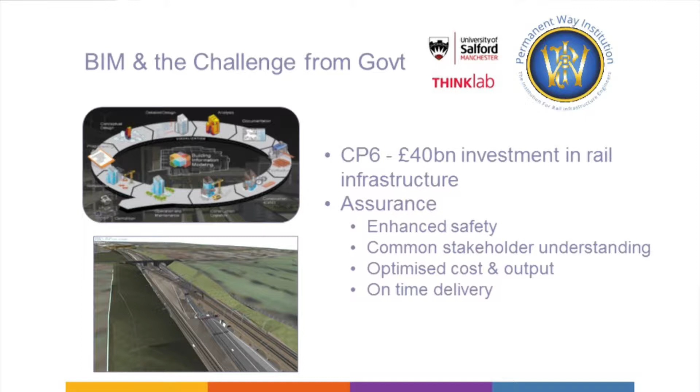The work that we've done is also an attempt to respond to the challenge from government to provide better value from the £40 billion of planned investments in rail infrastructure through CP6. Generally, it arose out of a request from Network Rail about 4 years ago to look at a specific track engineering project, a renewal project on the West Coast Main Line, and to look at the way that project was being planned and try to provide greater assurance in terms of safety, common understanding of all of the stakeholders involved, multiple stakeholders on that project, to try to optimize the cost and the output of that work, and also to make sure it was delivered on time.

So those are the general objectives, but more specifically, this project required a 9-day blockade of a section of the West Coast Main Line. And two different groups within Network Rail thought that it was best done like that. Other groups thought it could be done with less disruption in a series of smaller possessions. And this solution was initially built to try to model the different scenarios and see which of these solutions would actually work best. So that's where it comes from.

We've been working now with Network Rail for 4 years on a series of different projects where this software has been deployed. And the way we work is that each time we have a new project, it's generally an opportunity for us to add more functionality into the overall software solution. So it's been building, it's been getting better, and I'm planning to show you a demo of where we've got to today.

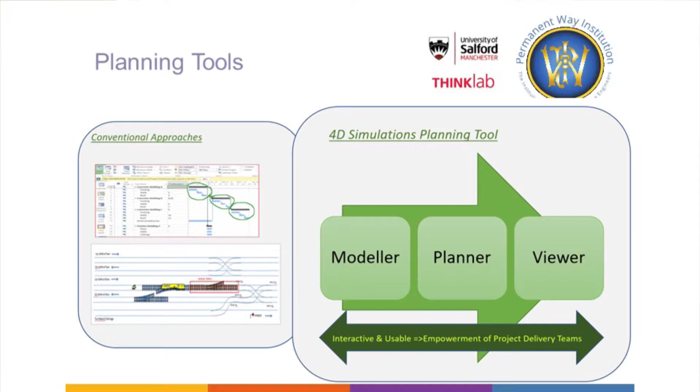And then what we have is the viewer. And the viewer creates a 3D realistic simulation that you can view from any angle, any perspective, to see what's going to happen and what that work is going to look like and feel like when it really takes place. So these are the three elements that we have built.

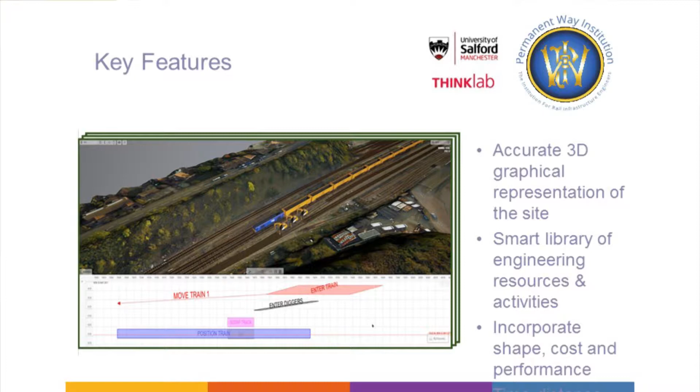So key features, so 3D representation of the site. Beyond that, we also have a library of engineering resources and activities. So what that means is when we talk about diggers and cranes and these various other assets, we have used and imported into our solution CAD models which have engineering accuracy and also information about the activities that those different pieces of machinery can perform during a piece of work. And the user, the planner, can select from that palette, if you like, that library of resources, and use that in the construction of the plan.

And that incorporates shape and cost and the performance of those assets. So we get a more realistic and more accurate plan as a result of having all the information there and available. You begin to see there a picture of what the software looks like, but we'll see that when we move into the demo.

So projects completed. There's been around 15 uses of the thing so far that are projects that have actually been completed through to the end of the actual engineering work. We have a few in progress at the moment.

Most of this work has been in the delivery stage. So our engagement has mostly been at GRIP stages 4 through 6, with the people involved in actually delivering these projects. Recently, though, we've actually started to work on projects at an earlier stage, GRIP stage 1 to 3, more in the optioneering phase, where there's been a requirement to model different types of designs. And that's interesting and takes us off in some new directions in terms of the functionality that's called for.

So we think it's been broadly successful. We've had good feedback from users. However, we could certainly do this more, and we believe what we're working towards is a new way of working, if you like, that could maybe in the future become a standard within the industry. So I'm now going to toggle to my own laptop so that we can start to see the demo.

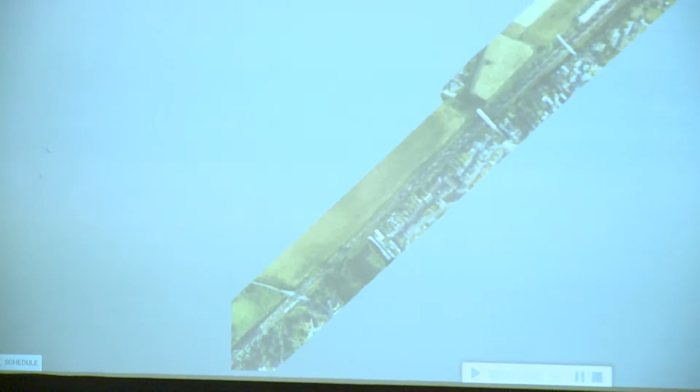So the first thing to note is that this is running on a laptop. It doesn't require a supercomputer somewhere. It's all pretty simple stuff. You need a reasonably powerful laptop, but it's nothing particularly special. The software is built

by us. What we normally have is we receive a request from Network Rail, normally, for a model to be built for a particular site. That's defined in terms of the geographical extent of a particular site. The site we're looking at there, you see an aerial imagery of a site that's about 2 kilometres long. In practical terms, that's about the biggest site that you would want to have within one particular model.

If you go beyond 2 kilometres, it tends to be a little bit tricky to navigate through the site, as we'll actually see. We could build more functionality to make that easier and enable bigger sites. It's not really a technical limitation on the size of the site. But the software is then created, it's incorporated with the model of the site, and then a user can download that and then work with it locally on their PC.

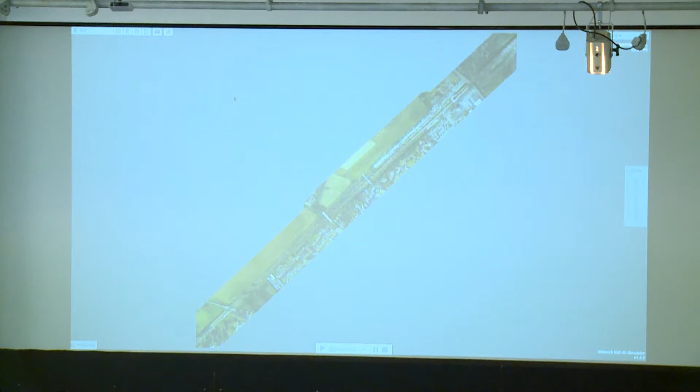So, what we have is an overview. And as I just zoom in, you'll start to see some evidence of what's going on here. So you can see the aerial imagery, and you can see the railway flowing through that particular cutting there, I think. But you'll see embedded in there more of a computer cartoon type presentation of the actual position of the track. So that's the actual position of the track overlaid onto the terrain.

And we can look at this from different angles and perspectives. We have what we call this orbital view. So it gets a bit spinning, and I'm not going to leave that on there for long for the risk of somebody having vertigo by watching this thing spinning around all the time. But I'll go to this free view, which will basically let us see where we are. So we can see a digger there, and we can see the track.

And at any point in the solution, we can change our perspective. We can move around in the site. We can view the thing from any angle, and we'll see some examples of how this is used in a second. Now, another key element of the solution is really the schedule.

And the schedule is a time and distance plan, where it's a chart where on the horizontal axis we have distance in chainage from a reference point within the site, and then down the left-hand side we have time. So in planning activities that are going to take place within this project, we simply click and add an activity for a particular resource to perform a particular function. It's fairly simple stuff. So before we can do any of that, we need to see our resources.

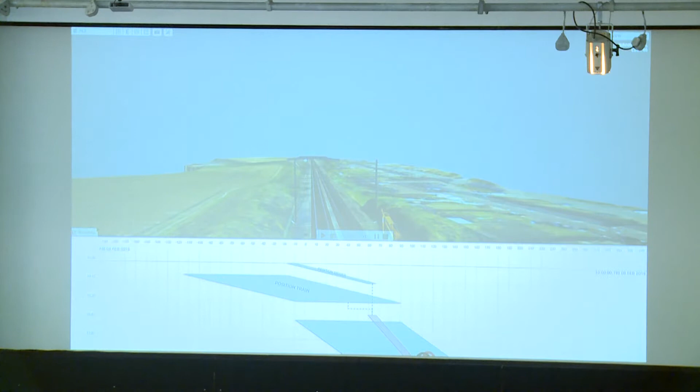So what I'm going to do, I'm just going to take the schedule away for a second, and we'll actually just look at what resources we've got available here. So I may want to add a new one, but we'll just have a look at this thing called the scrap collection train. And as I just expand that, we'll see that the train that we're talking about is made up of a locomotive and 4 Falcon wagons.

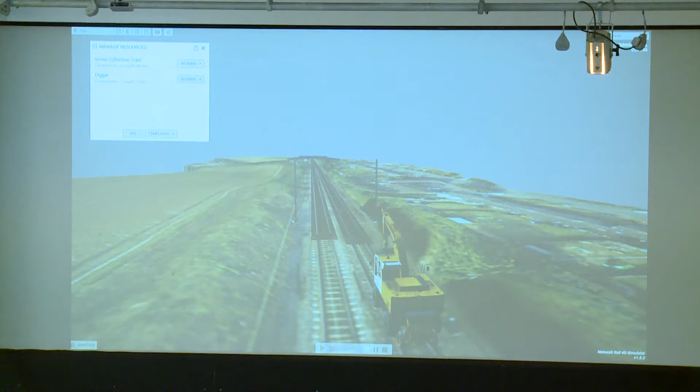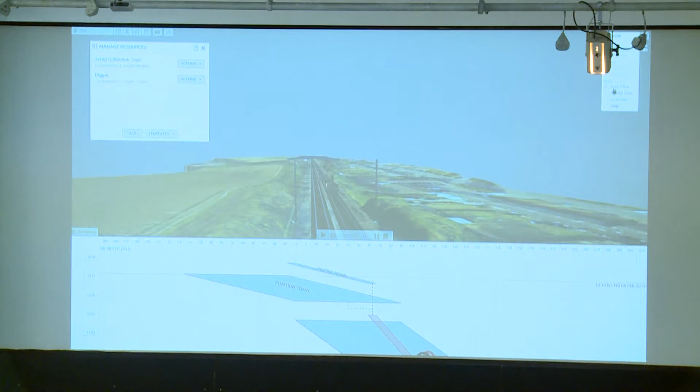And actually, let's just display the thing in the graphics. So if I go to there, then we just quickly switch to our orbital view. We should get a clearer view of it. Yeah, there it is. So there's the train that we're talking about, and I'll just let that thing spin round so we can see what's going on with it. That's probably enough. Okay, I'll just stop it there.

Okay, so if I wanted to change this resource, if I wanted a different type of train with some different components, I could go and add a new one, but for simplicity here, I'll just modify this one.

So if I wanted to add in, for example, a Kirow into that particular train, I could add it in, and I could position it within the thing, and then if I apply the changes, we see the graphics modify there and then, and we can see that resource. So we can put together any combination of resources that are then used for our different activities.

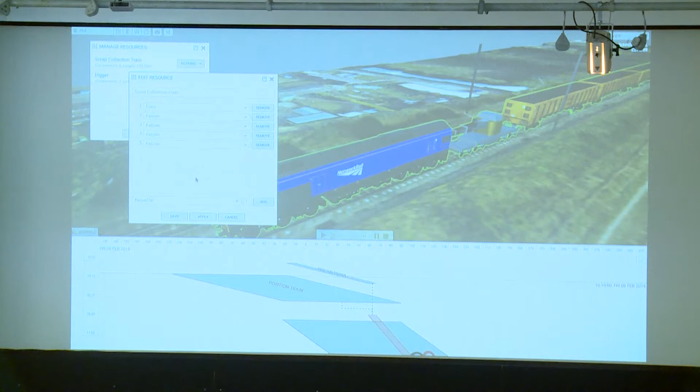I'm going to take that one out for now. And we've got a library of about, I think, 20 different types of equipment that are used within the projects at the moment. But as the different projects come to us, we typically find we need something else, and it's fairly quick and easy for us to add in new resources into the library that we have available.

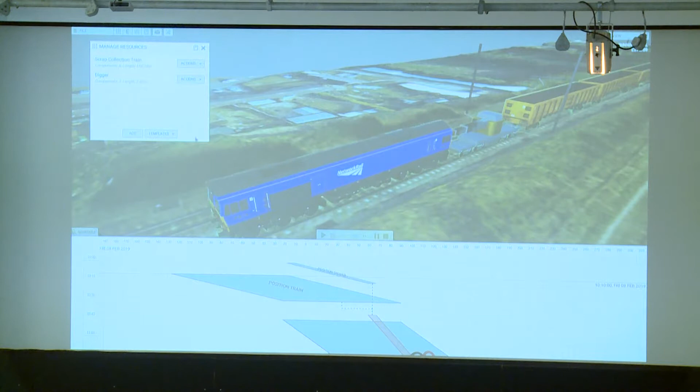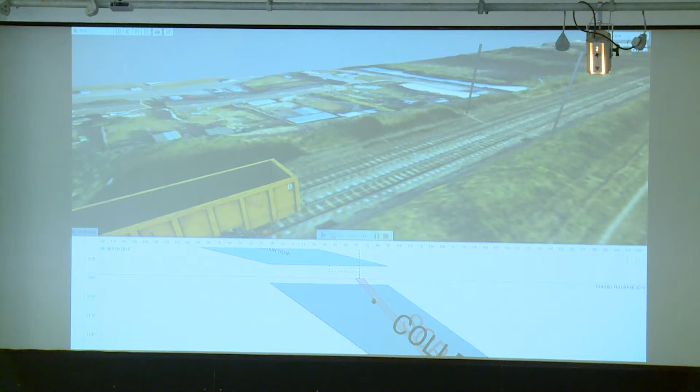Okay, so that's resources. And then when it comes to actually defining what they do, we have the time and distance plan. So if we look at, for example, this action that says position digger. In fact, actually, let's look at this one here that's in red that says scrap on it. I'll just zoom out slightly so we can see what's going on, because we've got activities going on in parallel, so the text kind of overlays there.

But if I just double click the action on the time and distance plan, we can see we have an action which is for the digger, that's within our plan here. It's called scrap, and it's got an action assigned to it which says scrap the whole track. And the planner can choose from this library of different actions, whether you want to scrap an individual rail, to install a new rail, to add top stone, to add ballast, whatever you want to do in there that's related to track engineering, you can select from this palette of different activities.

We then specify from where and to where it takes place. So it's greyed out here in terms of where it starts because the thing did something else previously. It knows where it is, so when we plan a new activity, it starts from that particular position. And we can specify where that activity is going to end. So the track in question of the 2 tracks we have running through the site and a chainage point. Also, what you can actually do is click on the little icon there and then select the 2 locations from the 3D graphics rather than to enter a chainage distance.

Then we specify a time, or what we can do is we can build in project dependencies. So this one is set to only start when it's been positioned in the site, and also when the related collection train has also been positioned into the site. And we can go and build in delays. Yeah, so we can specify it start a period of time after something else. So this is how we construct the plan, and that's what gives us the time and distance chart that you see there.

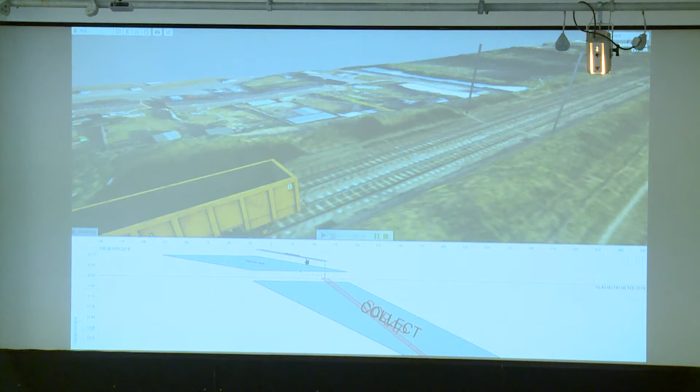So what I'm going to do now is I'm just going to play the action in a moment. So I'm just going to select that point, and you can see I've got the red line indicates time. So as we actually play the action, you'll see the red line time slider move down through the chart as time advances. So if I click play, you'll see the digger start to move.

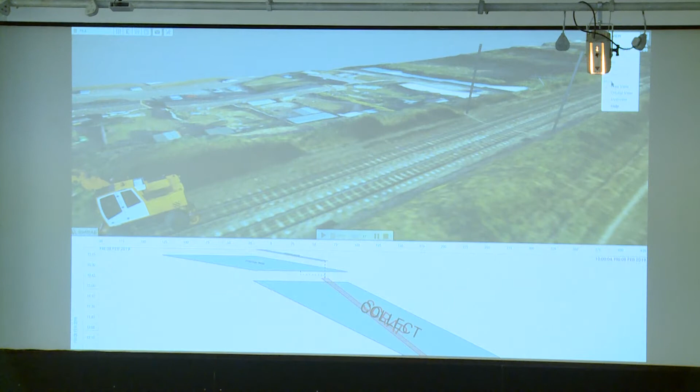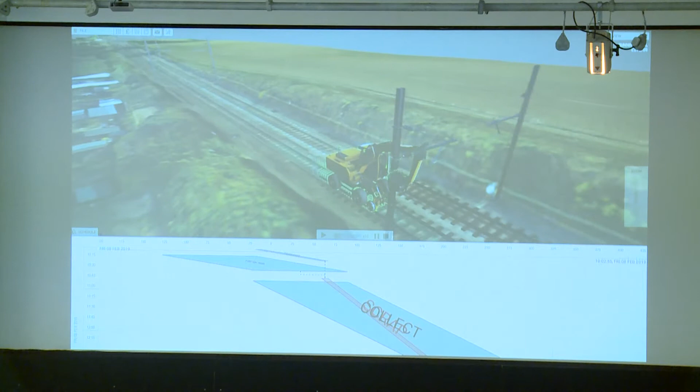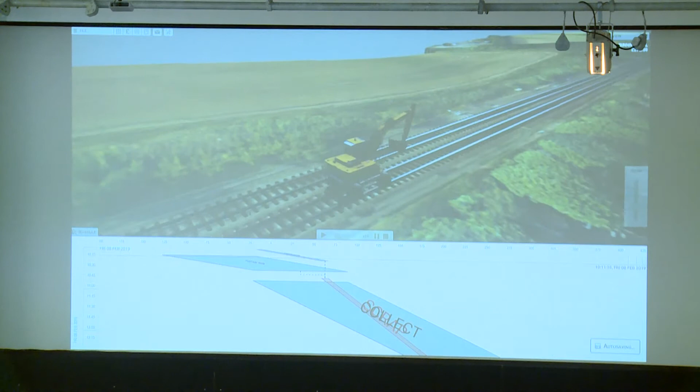And if anybody feels queasy, please shout, but I'm going to go to that view. Yeah, and actually I'm going to speed it up because we only have a certain period of time, and there are other speakers after me. So we're going to let that thing move through the site, and we can see as it progresses. In a moment, then the next activity is this train is going to start to position. And it's highlighting a blue section of the track there as I just hover my mouse over the particular action. So the train will arrive in the site.

Actually, let's just increase the speed a little bit again. Okay. And then in a moment, what we'll see is the scrapping of that particular section of track. And because we chose scrap track, we'll actually see that begin to occur within the scene. So as the digger moves away, yeah, we can see the track begin to disappear.

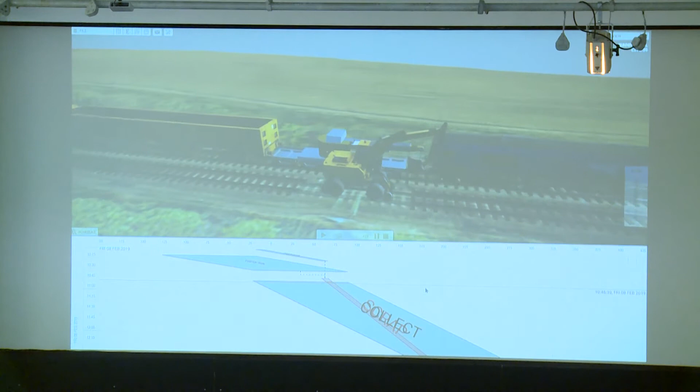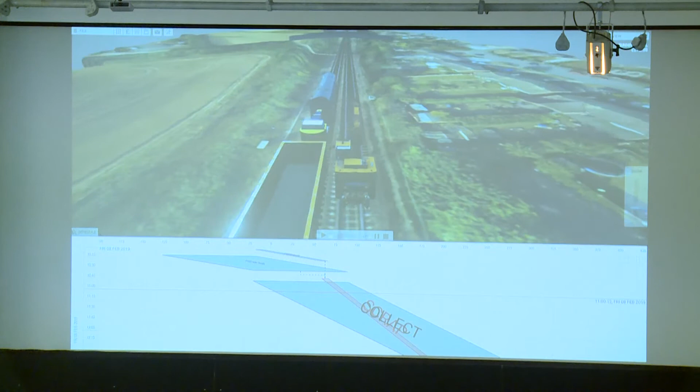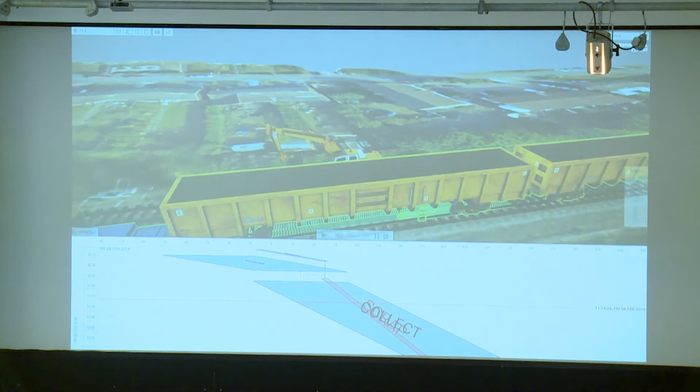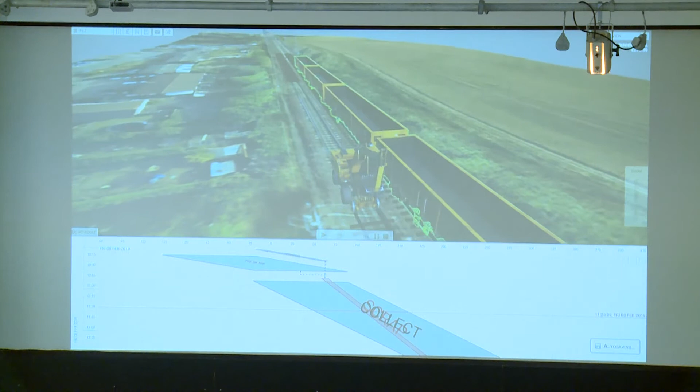And then it'll continue working like that, and the various pieces of equipment will move through the site. So how is this actually used in practice? Let me just pause the action. I'll let the action play a minute. It's proved to be very useful for clash detection, of figuring out we can actually get the equipment into the site. It's also been useful for removing some of the need to carry out a survey. We can actually see what's going to happen and get a good idea of it before it actually happens.

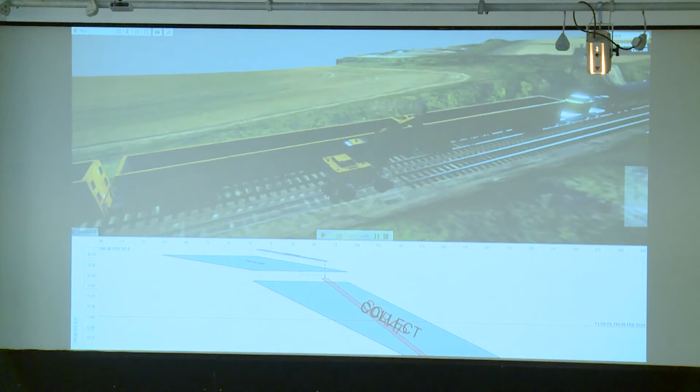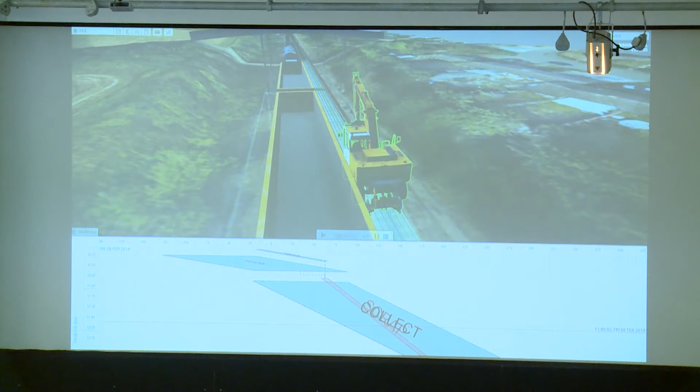It's also useful for actually figuring out the relationship of the equipment to the physical environment around the actual track itself. So if I just pause it there, and let me just stop it from spinning round, actually. You can see in the scene, there's a free view, we also have these catenary masts. So I was interested in figuring out the clearance between the digger and that particular mast. I could allow it to move forward a bit further and get a pretty clear idea of the amount of clearance we're going to have in that particular instance.

We've also found it to be quite useful for safety purposes. So it's been used by the stakeholders that are specifically responsible for health and safety, ensuring adequate clearance between personnel working in the site and the machinery to figure out actually what that's going to be like in practice. I'll talk more about the benefits later on.

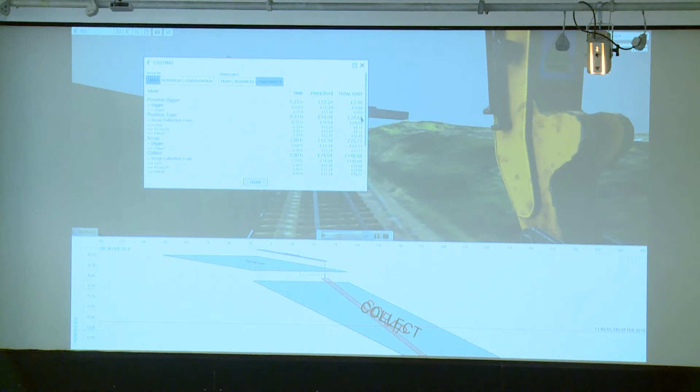So as well as actually building the simulation of how the project occurs, we've also started to look at some other aspects. So one of those is costing. Because we have now defined information about the assets we're going to use and how these assets are moving through the site, we can actually begin to associate financial costs with each of those activities. The numbers are fictitious, but we can start to view the time that each of these resources is used and see the cost and see a totalization of those costs also begin to appear.

We've also started to build some functionality for editing the layout of the track, so the layout of the track changes through the course of the project. We can toggle into an editor mode. If I just can select the right option over here. Okay, and then we can actually go into a track editor, and we can select each of these tracks and then begin to actually change the layout of them, add new tracks into the site by drawing onto the scene to model actually what's going to happen within the project.

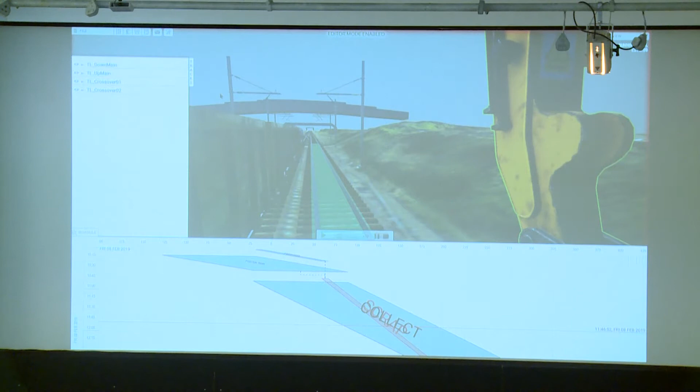Okay, so that's a quick demo. We could probably spend longer talking about it, but that's a quick demo of what's occurring within the solution. I'm going to toggle back now to the presentation PC, because there's a couple of other things I want to talk about. Other functionality we've implemented recently was an integration with the Primavera system. So we now have a file export, so all these activities and tasks that we create for the project plan can be exported in a format that can be imported and used in other systems, either for costing or other kinds of purposes.

We've also begun to implement functionality for other disciplines. So signals, OLE, welding, drainage. So far that's got as far as simply being able to mark out areas of the track where other kinds of work are occurring for a period of time. But we're moving on to be able to do more with that and incorporate other actions in our library of tasks to model those activities.

And then a third one here, which actually is really in the closing stages of development, is integration with point cloud data. So we have a relationship with a company called Fugro, who are one of the exhibitors you can talk to in the coffee room out there. They provide a system called RILA, the RILA portal, which is point cloud data providing more accurate modelling of the rail environment than is currently available to us for building our models from the GeoRINM system. It's captured using LiDAR, so devices mounted on trains that capture really accurate point cloud information, running trains at normal operating speed through rail corridors.

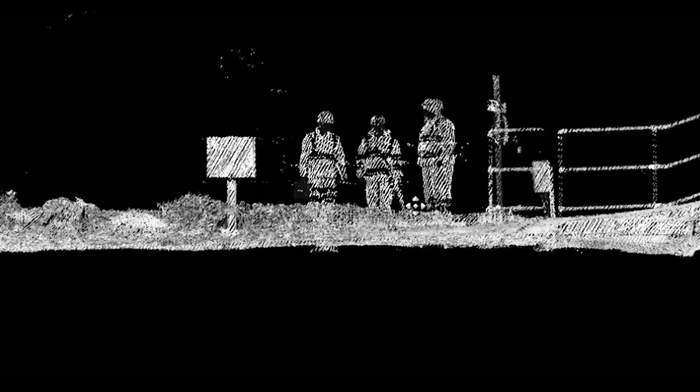The user can still toggle and move around and see what view the perspective, and can then start to perform measurements, which now are much more accurate than would be the case from the data that we have available currently from the GeoRINM system. So that's just an example of the kind of integration that we can do using this technology to provide more functionality and benefit for users.

We have a fairly extensive roadmap for how we're going to take this forward. We have something like 300 points on our roadmap of things that we'd like to do. But some of the priority items are, as I've mentioned, improving the simulations for other kinds of work. So the focus very much at the moment is on track and track renewal. But extending into those other areas is quite key for us.

We want to enhance that costing functionality. It allows to account for costs relating to the use of machinery within the site, but that's only half the story. It doesn't account for raw materials. Doesn't really understand about shift patterns, so there's some key aspects to the model for costing that we want to improve.

We want to improve the support for multi-user teams. So currently the way these plans work is a user can create a plan. It's much like working in Microsoft Word, where you work locally on your document and then you can email your plan to somebody else and they can also work on it. But we want to allow teams to work together at the same time on the same plan.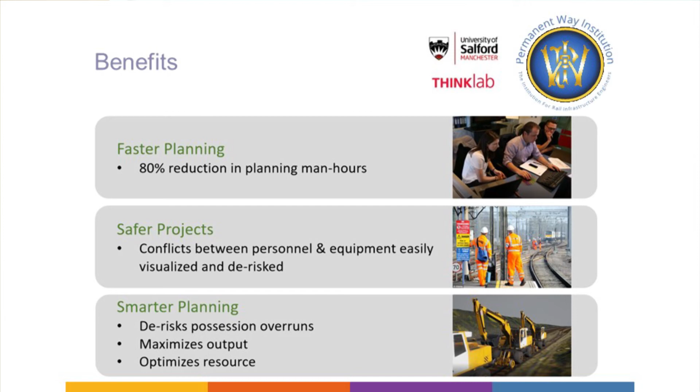We've seen benefits reported in terms of safer projects, greater confidence in removing conflicts, and also smarter planning. So by seeing what's actually happening, you can de-risk the overrun. You could analyse the data on Gantt charts and on staging diagrams to your heart's content, but there's nothing like seeing it to really understand what's taking place. We believe this maximises output and also optimises the use of resource.

So that's where we've got to. We have some plans for it. And we're keen to engage with other organisations specifically in these other disciplines. So we have access to some good experts within the university, but we're always looking to engage and get input in terms of this roadmap and functionality from other people who have interest in other disciplines.